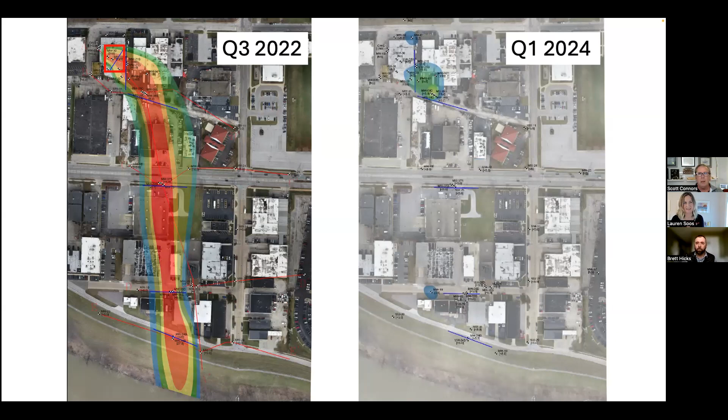So combining strategies is nothing new. We've heard about this in various different lectures from Mr. Jim Cummings here. He's been talking about this for years, probably decades, right, Jim? We appreciate his advocacy over the years for these smarter remedies, and this is just one of many combined strategies that have been implemented with thermal in the source. So we're excited to be talking about that today.

So Scott, I'd like for you to introduce the conceptual site model a bit more and talk about what were the site conditions? How did you end up making decisions on where to implement thermal versus the injection strategies that were implemented? Thanks, Lauren. Hi, I'm Scott.

It was a fairly simple CSM we had going here. Former industrial practices, leaks, spills, whatever, resulted in a fairly significant mass of TCE released to the subsurface. As you can see by the conceptual site model, the upper 10 or so feet was a lot of fill material, urbanite we call it on here. It tends to be very clayish, silty, and then we hit a natural clay layer, and it was pretty much free product bound up in the soil.

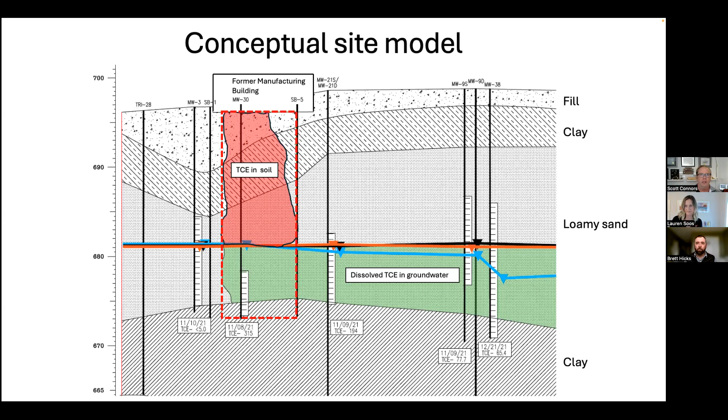We looked at doing thermal to basically cut the head off the dragon, and the injectables by Regenesis to kind of bisect the body in parts. It was a little more in-depth of a process figuring out how to do it, but that's what we came up with. The clients loved it. They said, "Wonderful, we want this problem taken care of." And then I approached TRS and called Brett and said, "Brett, need a plan. Let's put our heads together."

I love it. A little bit more about the source area, just zooming into the north side of the site and actually taking a look from within that manufacturing building, right?

This is just a small portion of the building that we're looking at here. Correct. Would you mind explaining a bit more about what we're looking at and how you ended up drawing the line for essentially the area that we were going to target for thermal?

Absolutely. Well, you can tell again, it's a typical Chembox analytical map. The areas in red are where we had the most elevated hits. This is showing TCE in parts per billion. We kind of translate that to the way we look at things, at least in Indiana. The highest one in that 4 to 6 zone ends up being 1,600 parts per million.

Based on the calculations we did with TRS, with the amount of TCE bound in the soil, it was pretty obvious to us that there was free product still bound up in there. So we knew we couldn't treat unsaturated soil with free product with injections. Excavation, while in some circumstances it would be possible, was ruled out for the site for various reasons.

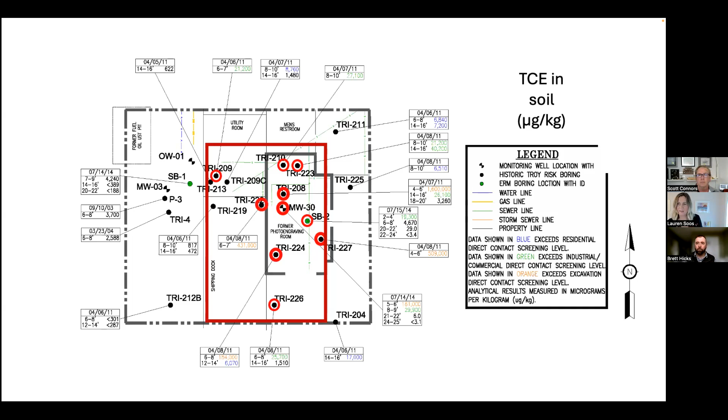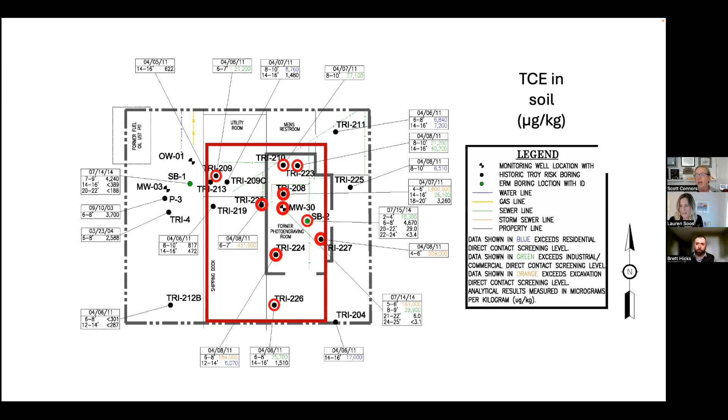So thermal became the best option that we had, and we looked at where we had the highest hits, or the most elevated concentration, and focused on that being the source area that we needed to treat with thermal. Yeah, a lot of these concentrations are indicative of DNAPL, right? So with injection strategies and DNAPL present in that tight, silty clay subsurface, it's going to be a pretty tough strategy. You needed a bigger hammer in this small volume of soil.

Yeah, it wasn't large. It ended up being approximately 1,700 cubic yards. Oh, there you go, 17. Yeah. It was approximately a 40 by 40 foot area, so it wasn't large, but the amount of TCE that had been lost to the subsurface over the years was substantial, which led to the DNAPL in the unsaturated soil and that long, cigar-shaped plume in the groundwater.

Yeah, so you mentioned it's not a very large area, Scott. I remember visiting the site back in the day. It felt big at the time, but once you were able to take down all the interior walls inside of the building, you realized how small it ended up being. Before those walls came down, we were in and out of different rooms, so it felt very large. But we only ended up installing 11 electrodes for this site. So very small condensed source material that you were dealing with.

It took about 4.5 months of heating in the end, and just about 500,000 kilowatt hours to get us across the finish line. That was a guaranteed soil remediation. I know those soil goals were really important to your clients, and it was actually built into our contract. Without a doubt, that was one of the big selling points to the stakeholders, because this is a problem that had been a thorn in their side for years, and they just said, "What can you do to make it go away?"

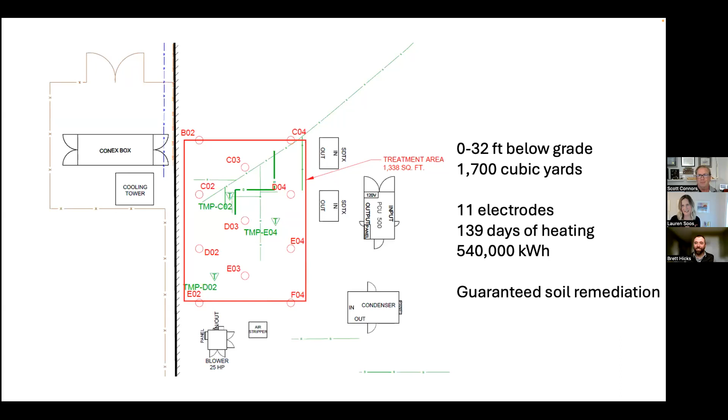So a little bit more details about the subsurface design here. You're looking at the electrode that was typical for this site. So all 11 electrodes looked like this. Fairly large diameter borehole, 12-inch diameter, all the way down to the very bottom of the target treatment interval, and actually beyond that by a few feet, just to overcome known heat losses that we plan for at the very bottom of the treatment interval.

So you can see some of the geology that Scott, you were describing earlier. We ended up encountering a layer of gravelly sand right above the clay that we expected. And we actually worked with Regenesis, and some of the data from the flux meters gave us some information that we needed to determine, should we deploy hydraulic management, or is this zone slow moving enough that it wouldn't adversely impact the heat that we're generating in this treatment volume. So a little bit more on that data set later by Brett, but that was really helpful and some good synergy amongst team members. Yep.

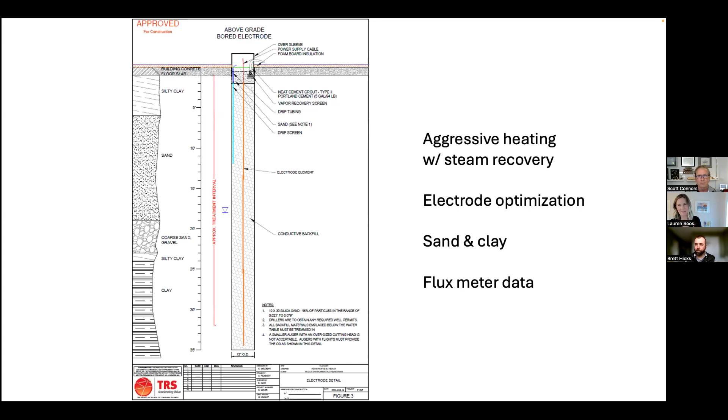All right, so this is how the site looked. We're standing kind of in the middle of the electrode well field, and some of the equipment is in the background here. So there's a lot going on in this figure. I'll try to walk folks through it, Scott, and feel free to chime in. So we've got one of the electrodes right here. You can actually see the vapor recovery line coming out of the subsurface. And this infrastructure right here is the electrode wetting system. So it's just dripping water to the subsurface, making sure the electrode maintains contact with the native material.

This wetting system ended up being extremely important to some of the early optimization efforts that our team took part in, just optimizing power delivery to the subsurface, which worked out well because in the end, we ended up consuming a little bit less energy than what we had originally designed. So that always feels good in the end. But back to that VR line here, you're looking at part of the manifold going into the steam treatment system over here on the left-hand side.

You also have an air stripper over here that is doing some treatment of the condensate that's generated from this steam treatment unit. And then the vapor from that air stripper is tied back into the steam treatment unit. And then in the background, I know you had some issues, Scott, with the owner not being available necessarily for signing of manifests. So we did use a small cell to treat some cuttings, right?

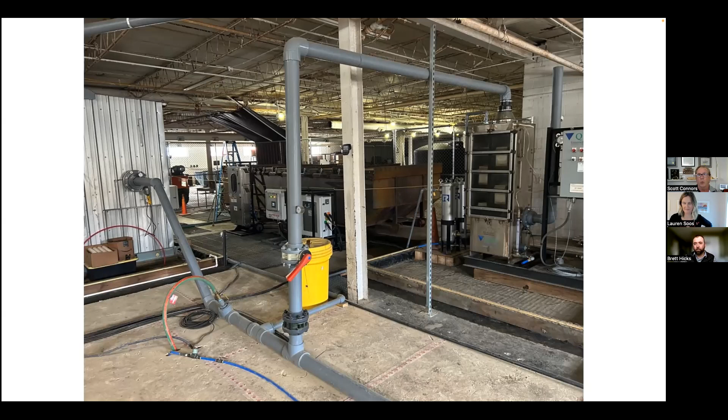Yeah. So there's a whole other side to this project, right, Brett? This is where you came into play. Scott and Brett, would you mind walking us through what was happening right outside of the thermal treatment area, that source area, and then what occurred down gradient? Yeah, absolutely. So thank you very much, Lauren, for the introduction.

Yeah, so obviously this is a big puzzle. So just to continue to build on that combined remedy effort, and using some of the synergies from the thermal, we started up in the source area. On this figure, you can see the far northern edge of this plume is where the source is. We initiated with 3DME, our slow release electron donor, an ISCR reagent, and a bioaugmentation, or BDI plus, to continue to eliminate that source and arrest that plume within the source zone where the groundwater contaminants were a little higher.

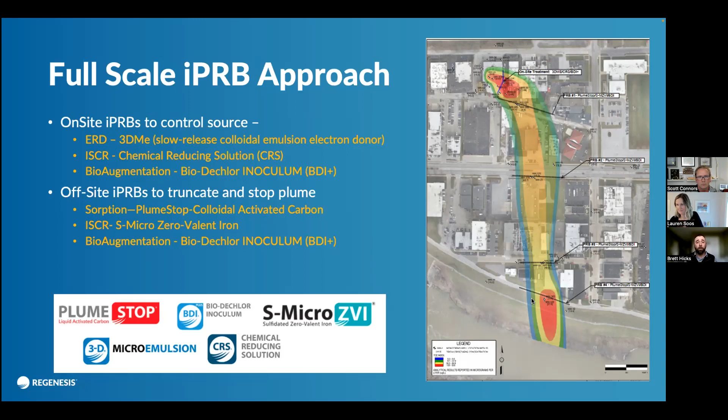So we implemented that just down gradient of the thermal treatment. Yep, right there, indicated by that blue line. That's right. And then as we continue to move down gradient, with the source being handled with the thermal, cutting the head off the snake, if you will, the primary goal was to arrest the plume that was migrating off site. And so we utilized our PlumeStop technology, colloidal activated carbon, paired with S-MicroZVI and our BDI plus in a series of down gradient PRBs to basically arrest this thing and eliminate that migration towards that barrier, as well as those offsite structures.

You can see on this figure here, the logistics was a challenge, just as it was inside the building with everything that TRS had to deal with. Then we move outside, and we've got the general public we're dealing with on some very busy roadways. So being able to have a very small footprint and work within those zones in a very busy environment was a challenge. But we were able to get a series of four PRBs that you can see here, one of which you can't see on this figure, implemented and get this program working.

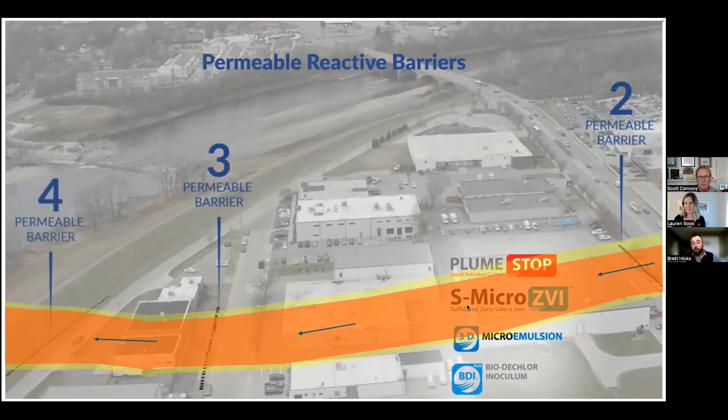But getting into this part of it, this was a very key, crucial part to this project as a whole. Design verification and really understanding the site itself was crucial. As Lauren mentioned earlier, we were trying to verify a couple things. On the very front end, we had some estimates provided from historical data, prior to Scott and I really getting involved, that had a very fast groundwater velocity estimate, upwards of 1,500 feet a year. So when we're talking about a PRB, those groundwater velocities are very fast, and mass flux plays a huge role in that. And Lauren also alluded to the repercussions that it could potentially have on hers and the TRS design.

So we implemented a technology that Regenesis has developed called flux tracers, and I've actually got one of these little units here. Hopefully people can see this little thing. These are in-well devices used to calculate mass flux and hone in on that groundwater velocity. So we deployed a series of these, 5 in total, 15-foot long devices throughout this plume to help us really understand how fast groundwater is moving. Is it really moving at 1,400 feet a year? And what kind of mass? Where is that groundwater contamination actually flowing through our aquifer?

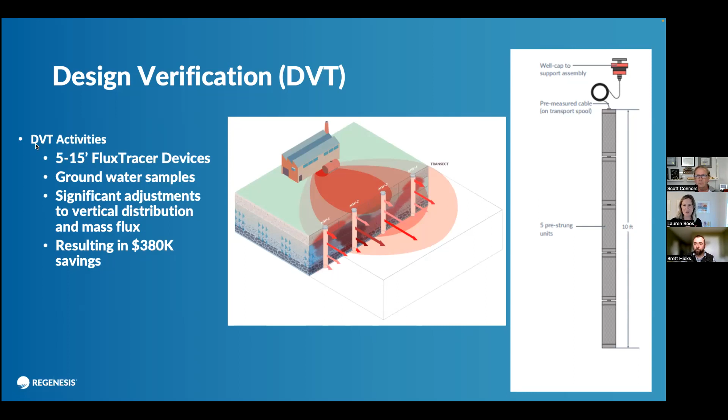A great testimony too that characterization really never stops. Even during remedy implementation, the data density just increases and you learn more and more along the way. Very important. Yeah. I'm sorry, Lauren. No, go ahead. Dive right into it.

Just to continue and wrap it up from an overall plume treatment and paint the overall picture, some statistics here on the sheer size of this thing. We had close to 1,000 linear feet of barrier that went in, 246 injection points. So we had a very large scope of work. But as Scott mentioned, it did vary.

You can see here in the summary table, going down and tagging that aquitard in that bottom zone was very important. And you can see the depth as it changed as we went towards the river. So being able to dynamically roll with the punches, if you will, and figure out where that treatment interval is as we moved throughout this injection program was a crucial part.

And you can see there the timeline on this was, as we talked about earlier, in the colder months. We weren't able to use the warmth of TRS's building for very long outside, but our guys hammered through, and we were able to have a successful project completed throughout the winter months in Indiana. So it was great.

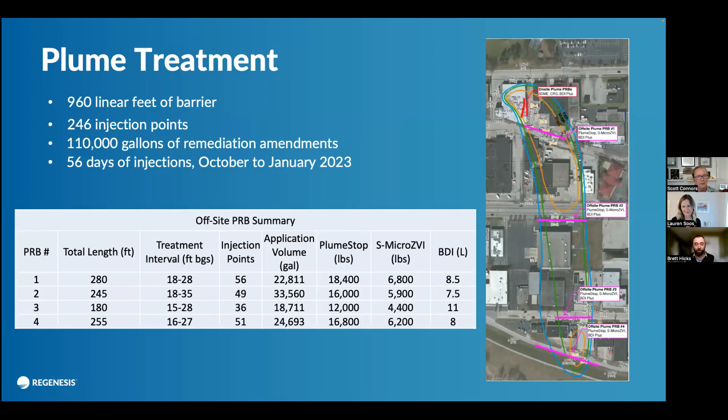I remember that last day. We didn't have a very nasty winter at all in Indiana. It got cold a little bit, but it decided to snow about 6 inches on us the last day. We talked about giving the guys a day off, let the snow melt, it'll be 60 tomorrow. And this field crew said, no, we're getting this thing done. So yeah, we were pretty fortunate. It wasn't all blue skies and green grass, huh, Scott?

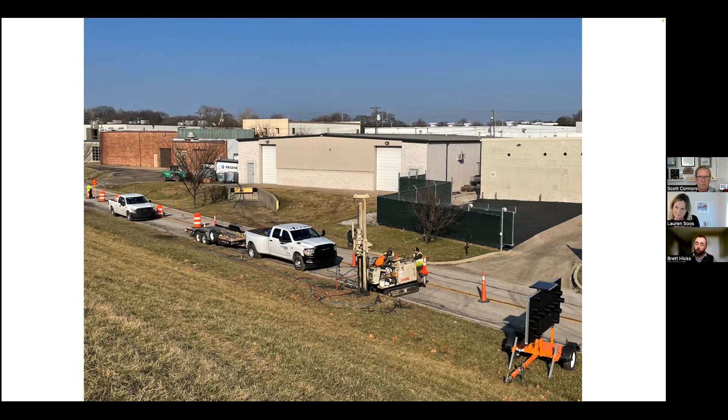And it's something that we do throughout the process. So each one of these barriers, we have a placement validation plan. It's tough to see in this figure here, but you can see the injection points laid out there with the individual hoses going to the points. And so we're collecting cores in between our points, making sure that the desired overlap, the radius of influence is being achieved. And this next slide kind of shows that and what that typical placement validation looks like and what we're looking for in that treatment interval.

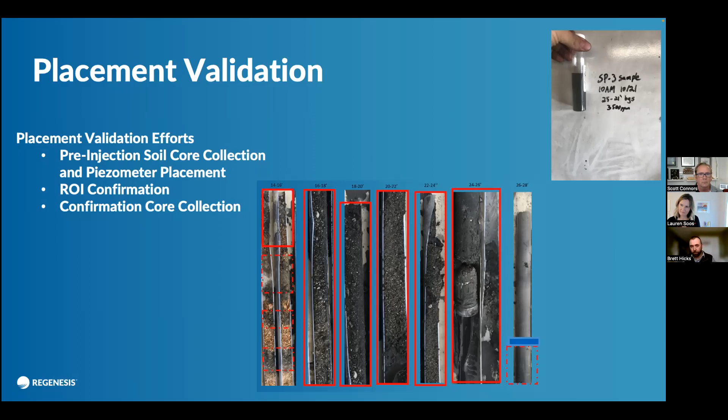Just a quick question, Brett, just walking folks across this borehole. So you've got that sand that you're looking at here right across until you travel into the clay, right? And that's ultimately where you land over here, that confining layer. Yes, ma'am. Thank you. So that confining layer is there on the right. So we go down and tag into that a bit. And then we pull up and start our injection interval right at the top of that clay. And in this case, come up to about that 16-foot interval right there.